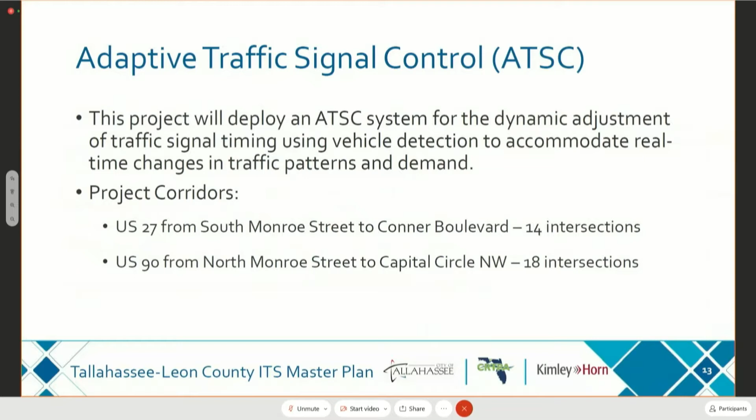Studies have shown this technology is better suited for corridors with dynamic traffic patterns. The two locations identified were Tennessee Street, right along the campus, and Apalachee Parkway, where we have a lot of the retail. That's where we experience a good bit of dynamic traffic patterns, really best suited for this type of technology.

It's the same idea, not quite the same level of priority, with transit — if we know where the bus is and that it might be behind schedule, we can turn the light, either extend the green a little longer or bring it up sooner, to get the bus through and keep it on time. The idea is to improve on-time bus performance and reduce bus travel times to make our system more reliable.

We upgraded our controllers, the brains of the traffic signal, back in 2016, which allows us to take advantage of this, and we also upgraded our preemption system, which is what the emergency vehicles use. So this transit signal priority piece is simply adding more devices to the buses themselves to take advantage of this technology.

The next project is the I-10 Trailblazer project. This has been talked about for probably the last 10 years or so — how do we handle major incidents, particularly an I-10 freeway closure? Right now, when an incident happens on I-10 and folks are detoured onto local roads, motorists are kind of left to their own devices once they get off the freeway.

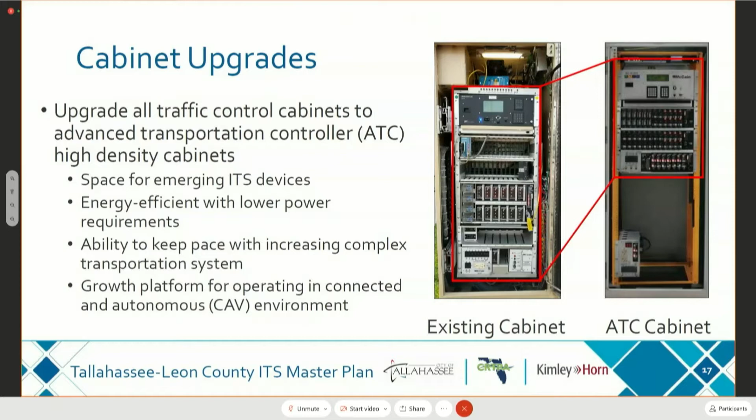When we talk about this, think about things like dynamic cruise control, or the fact that your vehicle can decelerate if you're approaching the car in front of you too quickly, or sensing the lane and if you're moving outside of that lane, it can give you a warning, or in some cases some of the newer vehicles are able to guide you in the right direction. So we're seeing this happening. The automotive industry is definitely moving forward in these directions.

And as this changes, it really does change the landscape of our transportation infrastructure. So we want to be thinking about that.

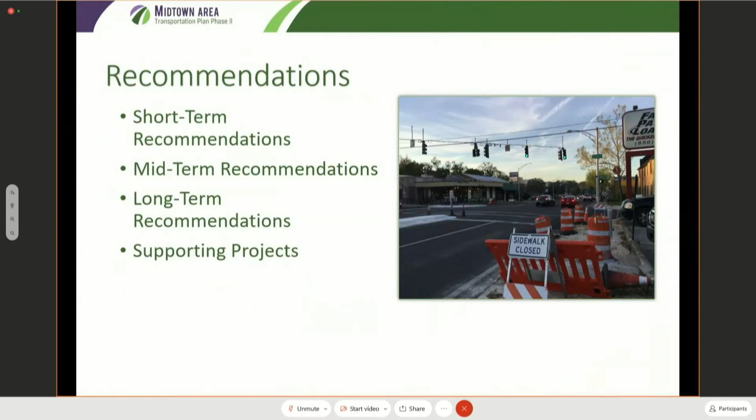The way we have these broken down are by short, mid, and long-term recommendations. Some are things that will be done by partnerships throughout the city and the county, as well as we're going to highlight some supporting projects, just to show that we know Midtown - there are a lot of things happening, it's exciting, and we're going to start to see some really great changes there when it comes to the transportation network.

So these are some of the recommendations that we'll walk through today. One of them is Meridian Road, which was really identified as a gap within the transportation network. So from 7th Avenue on Meridian Road, where Midtown Caboose is located, we're recommending that a sidewalk be placed on that corridor that connects where the sidewalk currently ends up to south of Tharp Street, right in front of the church there, where the sidewalk on the northern part of this area currently ends.

So we've recommended that a study be looked at to determine if this is feasible, just because there are some right-of-way constraints along this area, and we know that's going to make adding a sidewalk very difficult. But looking at a study to see if there are opportunities to put all the utilities on one side of the corridor to accommodate at least a 5-foot sidewalk on the other side would be really great and help with connectivity.

It also helps to get some movement going from those that live in Los Robles. We had a couple meetings with that neighborhood association, and several participants came to the public meeting, but they really felt isolated in terms of connectivity. They live right there in Midtown, but it's very difficult for them to get out of their neighborhood by foot or bike safely to access everything nearby. So another recommendation is an RRFB crosswalk at DeSoto Street, which connects Los Robles to Lake Ella, and if there was a sidewalk on Meridian, that would extend further south to everything else within the Midtown area.

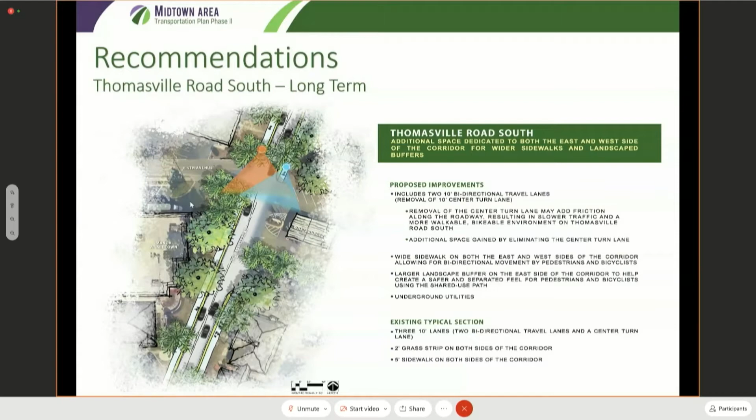So the next slide shows those renderings. The photos on the left show what's existing out there, and on the right shows what it could be.

As you can see, it's wider sidewalks, wider paths where people could move bidirectionally on bikes as well as on foot, with some nicer landscaping to add that buffer that we heard from a lot of the public they wanted to see—not just grass, but plants to make it feel a little safer for those using the facilities. Removing that center turn lane is also going to add friction onto the road, which will slow people down as well.

These are the cost estimates developed for the project. We looked at a low estimate as well as a high estimate—used some DOT data, talked with Blueprint about similar projects they had and got some numbers from them. We came up with about a $2 million low estimate to a high estimate of about $3.5 to $4 million.

That estimate includes undergrounding of utilities in this area. We looked at undergrounding because we really feel like this space from Monroe Street up to 7th is really the heart of Midtown. It's an opportunity to make it a place, make it feel like a destination, and undergrounding the utilities really allows for this recommendation to be implemented.

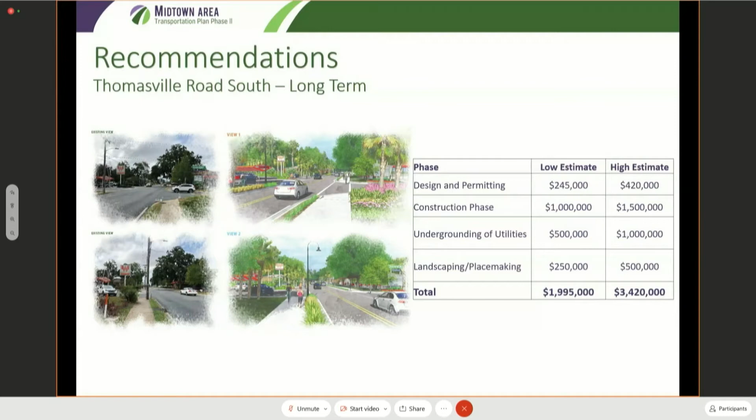For the north part of Thomasville Road, this really looks at Colonial Drive up to Betton and Bradford Road. Colonial Drive is where Thomasville Road starts to expand into a 6-lane corridor—essentially 3 travel lanes, and then you have some left turn lanes.

So the recommendation for this area is to reduce one travel lane in each direction, making it four travel lanes, while keeping the existing left turn lanes that allow access into the Whole Foods parking lot and the Five Guys parking lot on the other side of the road. That would also allow for shared use paths on both sides of the corridor.

Right now what's existing out there is a lot of inconsistency with the lane widths—the outside lanes are 14 feet, middle lanes are between 11 and 12 feet. With how Thomasville Road goes from 2 lanes to 6 lanes down to 4 lanes, there's some inconsistency. So bringing it down to just 4 travel lanes that are all consistent, probably 11 feet, allows for much wider shared use paths with buffers out there.

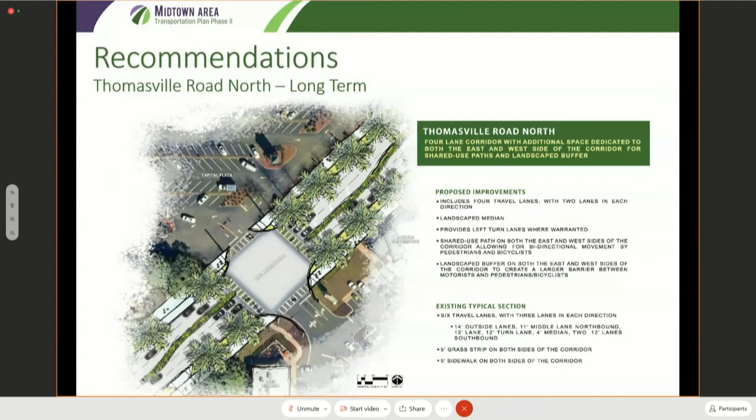On the next slide we'll show you what that looks like—what's existing versus what would be proposed with the removal of those 2 travel lanes in this area. For this one we also created cost estimates, a high and a low.

This project is going to take a lot more coordination, and the southern part is as well. These are both really long-term solutions involving partnerships and working with FDOT—we have met with FDOT and talked to them about these projects, and just understanding what we heard from the public moving forward.

So this project would be about $3.3 million to about $5 million, and that includes undergrounding in this area as well, just to be consistent within this whole project area. It would allow that shared use path, that more accommodating pedestrian and bicycle facility, to go all the way from Monroe Street up to Betton and Bradford Road. That's really a huge piece that connects a lot of different destinations people want to connect to.

As I mentioned earlier, we want Midtown to become a place where people can park once and be able to feel comfortable and safe walking to all the destinations along this area.

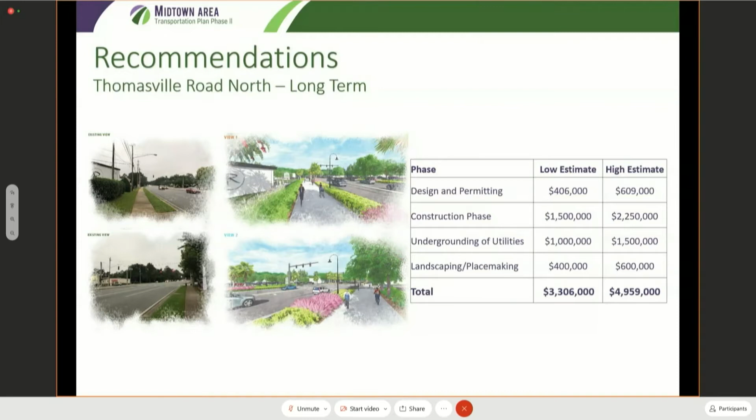So Monroe Street is a little bit more difficult because there's not really a lot of...

No room here, but with Monroe Street, there's not a chance to change the current configuration of the road like we did for Thomasville Road, where there was existing traffic out there to remove those extra lanes as well as the turn lanes. Monroe Street, we don't really have that opportunity, and there's really not right of way to be flexible with.

So some of the recommendations coming out of Monroe Street would be more looking to modify that center turn lane to accommodate some landscape medians for more of beautification out there, and really trying to figure out opportunities to maybe change the lighting that's out there. A lot of the possibilities for Monroe Street could come from redevelopment along this corridor that would accommodate things like larger sidewalks and better landscaping. But these are some of the recommendations we'd have moving forward, having that landscaped median to beautify it a little bit.

Now we'll go through some of the supporting projects quickly. There are short-term pedestrian improvements going on between summer of 2020 and summer of 2021, FDOT is going to add RRFB, rectangular rapid flashing beacons. It's similar to what's out there right now at 5th Avenue next to Whataburger to cross the road. They're going to put one south of Calhoun Street at William Street and then south of Beard Street, so there will now be several to allow people to safely cross within that heart of Midtown area. That's something we'll see installed out there by DOT hopefully within the next 9 months.

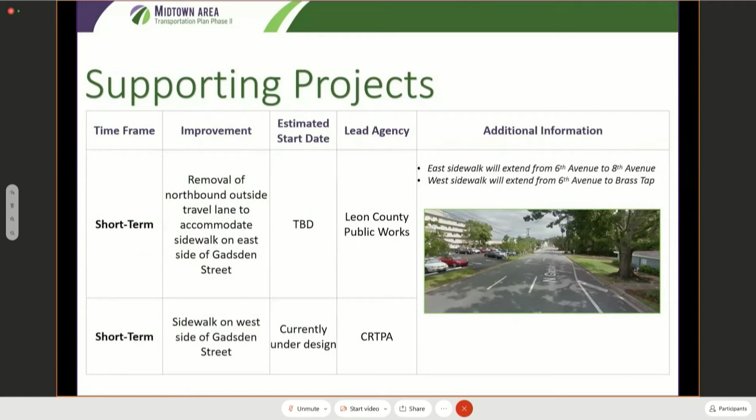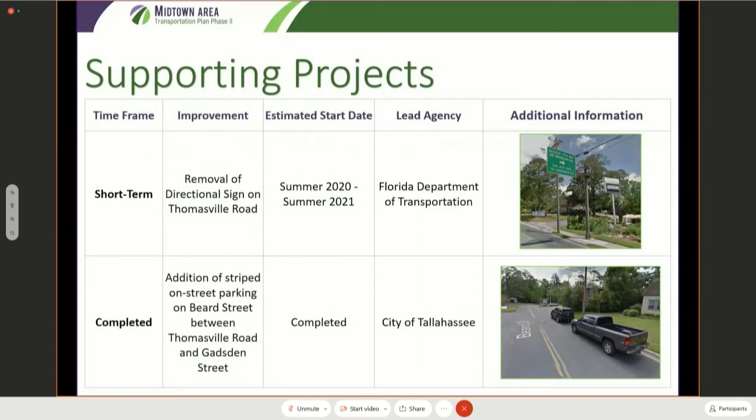Removal of the directional sign along Thomasville Road is also something DOT is going to come out and fix within the next couple months, getting rid of that large sign that's currently in the middle of the sidewalk and impedes movement along there. As well, the city has recently put some striped on-street parking along Beard Street between Thomasville and Gadsden Street, so if you've been out there recently, you could see some of that.

As well, the midterm recommendations include that Beard Street realignment and pedestrian crossing. That's something we'd like to see done within the next 5 years to really help with how people move at that intersection, as well as allow for better crossing so people who live within the Midtown Lafayette Park neighborhood can better access Midtown.

And then just some additional safety improvements along Thomasville Road. This study has been completed by FDOT, and it would look at that area from 8th Avenue all the way up to Betton Road, so that really needs to be coordinated with the recommendations we've made out of this plan.

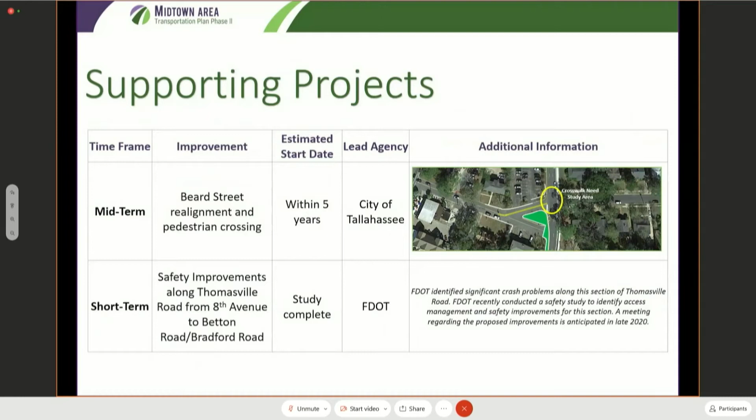So the next steps, as I mentioned, will be additional traffic analyses for those long-term recommendations along Thomasville Road, really understanding how it might affect the left turn movements as well as the intersections out there, and then ongoing coordination with DOT, City of Tallahassee, and Leon County to implement the other recommendations from this project.

But it was really incredible to see how many people wanted to come and participate within this project and gave us a lot of feedback. That's the reason why the one-way idea went out the door very quickly, we heard right away from businesses and residents it wasn't something they wanted to see. So that's where we had to start to be innovative and think what else we could do within the existing right-of-way to accommodate what we were hearing from the public in terms of having better connectivity, safety, and more of a place. With that, I am more than happy to answer any questions that y'all may have on this and talk through anything in more detail.

Mr. Chairman? Yes, sir, go ahead. Thank you very much, Caitlin, great presentation.

Thank you very much, and this is really exciting work. I think many of us went to some of those public meetings on the Midtown Plan and spoke to a lot of the folks that were there, and it looks like you incorporated a lot of their feedback, which is great. Just one question on the traffic studies for the long-term recommendations for Thomasville: when do you think, what's your best guess on when some of that analysis might come back to us?

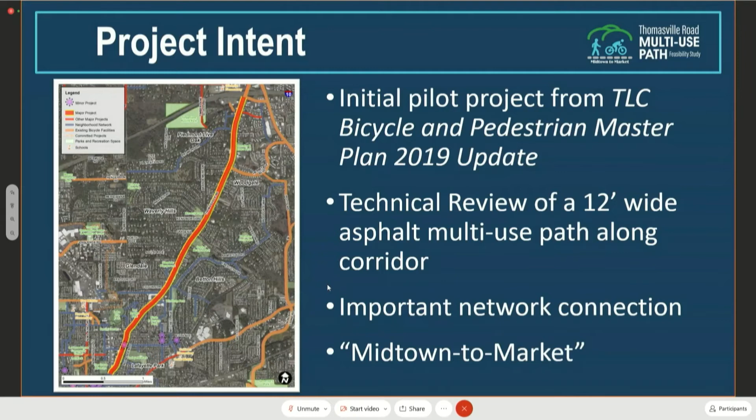So we looked at Thomasville Road and said to ourselves, there are partial facilities out there, and there sure are a lot of people who live along this corridor. As you can see on this aerial, just thousands of people are directly connected to Thomasville Road. So this project was identified as a major project as part of this early initiative coming out of the master plan, to analyze whether it's actually feasible to build this.

So with that in mind, we have several project goals. Obviously, we want to maintain safety. We want to provide accessibility to all of those residences and businesses along the corridor. We want to make sure we're providing the best network connectivity in the study area. We also want to design a facility that's going to be used and enjoyed by people. It is a very noisy corridor, so that's something we'll have to keep in mind. We want to be equitable and make sure we're serving aging populations and low-income areas as applicable. And we want to make sure we're being multimodal and providing health and recreation benefits.

Our project approach, we broke this down into two parts. The first part is looking at connecting it from Betton Road up to Metropolitan, and then from Metropolitan into the market area. I'm going to take these one at a time to better understand the areas, since there are different needs in the corridors, so we're going to step through these one at a time.

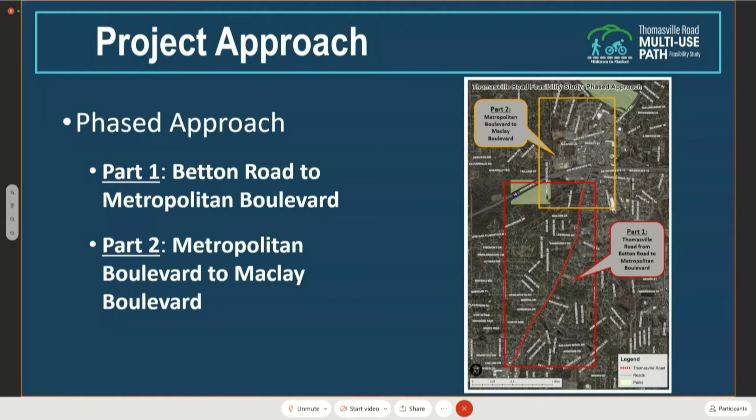But first, I'd like to talk a little bit about some of the activities. I said this is a technical analysis and not necessarily with full public involvement as yet. We've done a lot of site reconnaissance - both planners and engineers have been out there to look at the corridor. We assessed right-of-way, sidewalk locations and condition. We looked at the existing bicycle and pedestrian facilities. We looked at all the intersections from the standpoint of whether they're residential access points, public streets, or business locations. We even have a firehouse out there, so we had to look at all those different aspects of those crossing facilities.

We wanted to also look at this from a parks and recreation perspective. One of the things this corridor would do is actually connect as many as 6 to 8 existing parks, which is not currently the condition out there. We also looked at schools, and we performed a preliminary tree assessment, since I'm sure a lot of you know there are a lot of mature oaks out there, and folks generally pay attention to that and appreciate it.

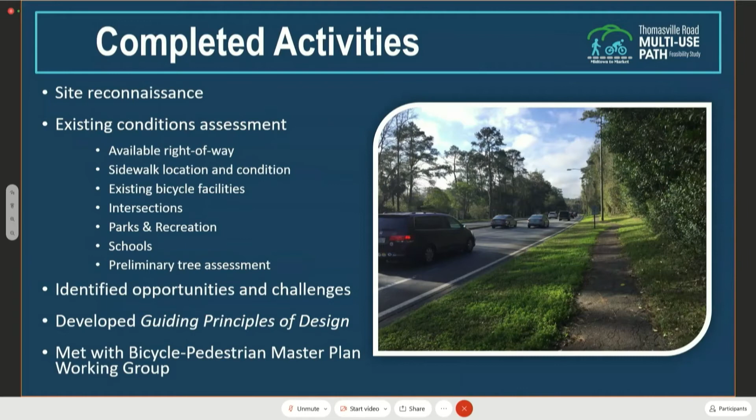So we've done all of that. We've identified the opportunities and challenges for this corridor, and developed a set of guiding principles for design—things like understanding there's topography out there, so we'll have to design these intersections with that in mind. We also met with the implementation arm of the master plan, our bicycle pedestrian working group, to get input along the way.

So this part one section from Betton up to Metropolitan is a 4-lane road. We've got landscaped medians out there and turn lanes. There are 4 major intersections that would have to be dealt with, and there's a 45-mile-an-hour speed limit out there.

On the east side of the road, there's an ADA compliant sidewalk that a lot of people use on a daily basis. We've seen everything out there from kids on bikes to joggers, and we've seen folks doing all of those things at one time. It gets a lot of use.

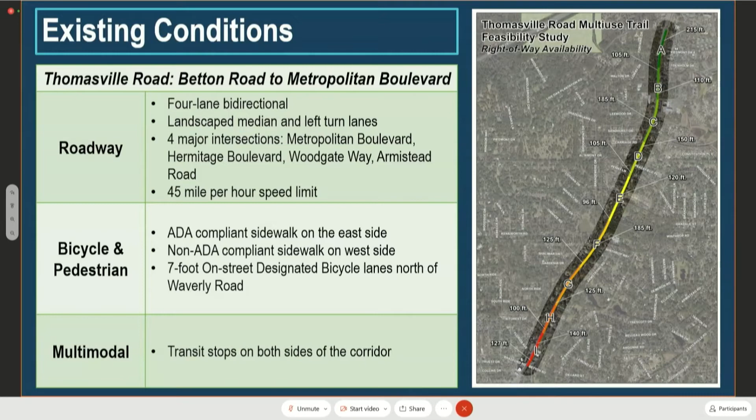On the west side of the corridor, there is a non-ADA compliant sidewalk—I think that's what it was intended to be, but it's basically asphalt that does not meet any current standard. There's also intermittent 7-foot on-street designated bike lanes north of Waverly Road. This is discontinuous throughout the corridor, installed a few years back just because the outer lanes were wide enough to do so. There's also transit stops along the corridor as well.

So I mentioned the parks. This is the list of parks directly connected to this segment: Dorothy Oven Park, McCord, Waverly, and the Goose Pond Trail that connects over to Hermitage Boulevard.

We're looking at things like the positive user experience. For those who have used the coastal trail down on 98 in Wakulla County, you know there's a pretty significant effort put in toward keeping the trail off of 98 as much as possible. That would be the goal here as well—we'd like to keep this landscaped and buffered from the road as much as possible. There are also some complementary projects that I'll talk about later that merge in with this project.

We also have these other existing facility connections. We want to connect to Hermitage and the designated bike lanes there, Metropolitan and the bike lanes there, and then the Goose Pond Trail—we have a great connection to that as part of this preliminary plan.

We'll also look at safety improvements along the corridor in several different locations, and we'll look at signalized intersections where a crossing could occur where we need it to. There are some right-of-way constraints in the corridor, but nothing we can't deal with in terms of this being feasible.

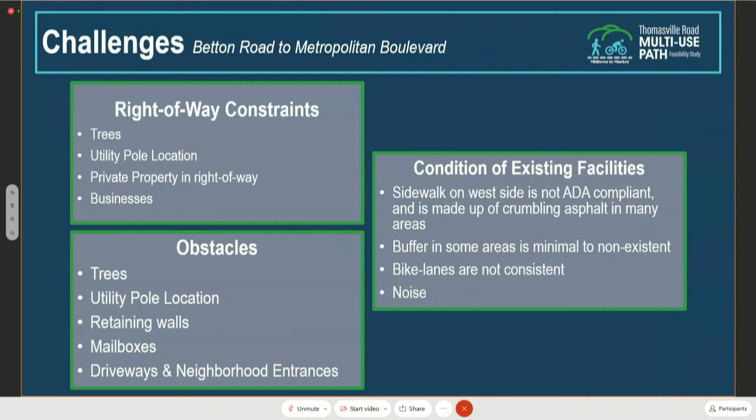So I'd like to talk a little bit about these complementary projects. One of them is the McCord Pond Drainage Ditch Improvements. This area is actually just north of Betton Road. There's a drainage corridor that goes through there, and this is actually being used by people today—you'd never know it, but this is directly adjacent to Thomasville Road.

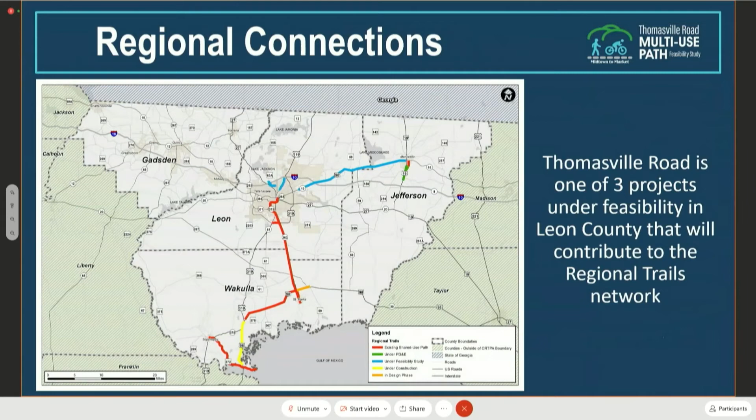This slide basically shows how Thomasville Road fits into this larger regional connection. It's one of 3 projects currently underway for feasibility, including the US 90 corridor and the Lake Jackson corridor. This slide shows the very important connectivity of Thomasville Road throughout the network. All of these dashed lines are other routes identified in the bicycle and pedestrian master plan, and you can see that Thomasville Road is a vital connection through this area. As I mentioned earlier, it connects from the Market District down to Midtown into other areas in the network.

So just some of the next steps. I talked about this public engagement outreach that will begin soon this fall. We'll be holding additional stakeholder meetings and coordinate with local neighborhood associations to get input, opinions, and buy-in. We will organize engagement opportunities virtually, in person, or however we can conduct that, and ask for their feedback so we can make sure the feasible alternatives are based not only on technical analysis, but on input from the public here in Tallahassee.

So with that, I'd be glad to take any questions that you have at this time.

Curtis, are you there? I made it back. I don't know what happened. Okay, what was your question, Curtis? Oh, I couldn't hear. For some reason I lost the last part of the presentation. I had to get off and come back.

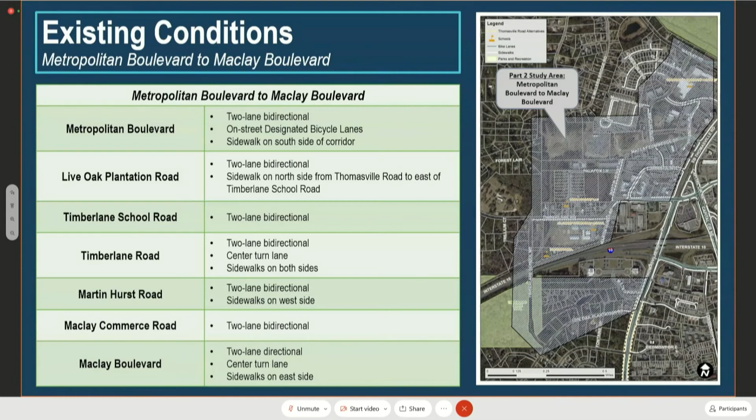And you mentioned those schools, I'm glad you did. On that path that I showed you earlier, there actually are gates and fences along this corridor right here that back up to all those schools. So it was kind of interesting. You can literally look over the back fence of those schools from this corridor right here. Yeah, I've walked that goat trail quite a bit myself. It's not the most appealing, as you stated, but with the improvements you're talking about, I think people are going to be very, very receptive to it. So thank you very much.

Thank you, Mr. Chair. Yes, sir. I can't see raised hands, but Kristen, I'm sure yours is raised. So go ahead.

Thank you, Mr. Chair. I actually don't have a question. John, I think this is a great presentation. And since the chair gave me the opportunity, I'll just say to Greg Burke, Greg Slay, and Jack, I suppose, I think this is another example of a project that could really use that kind of flow chart to map out who's doing what aspect. I know we're at an earlier stage than we are with Midtown, what we just talked about, but I also have walked that goat trail a good bit, although I've never seen Commissioner Minor out there at McCord Park. But I think a lot of people actually discovered it in the last 6-7 months as they were staying home, and my sense is it's gotten a lot more traction - no pun intended - but a lot more use. So I do think the improvements are going to be welcome, but if there's a way to map out the blueprint piece of this, the city, county, CRTPA piece of this going forward, that will help us with future decisions. So thank you very much.

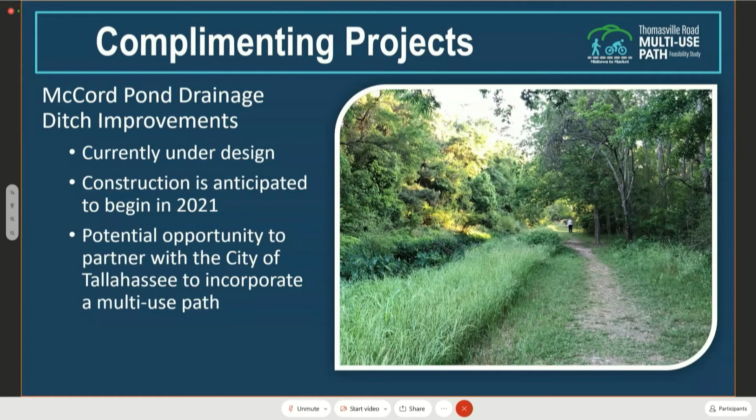I'm excited about this. Are there any other questions or comments? Mr. Chairman? Yes, sir. Just very quickly, the city is looking at a bicycle park in the Market Square district. Will this connect to that bicycle park? So this slide right here, this is the park where I believe that bicycle park is proposed, Commissioner?

Yes. And yes, so basically our project would connect in this southern leg right here on Martin Hurst Road. And then we would cross probably right about here - I don't know if you can see my cursor. It will connect here and then connect to this trail, and then their trail is actually going to connect up to this point on Maclay Boulevard. And then we have a trail that actually goes along the west side of Maclay and connects all the way up to Maclay Road, where there are existing facilities today, and there's also a planned sidewalk on Maclay Road as well. So there's a lot going on in this area, and it's all been well coordinated, we believe, to provide really good network connectivity through this area.

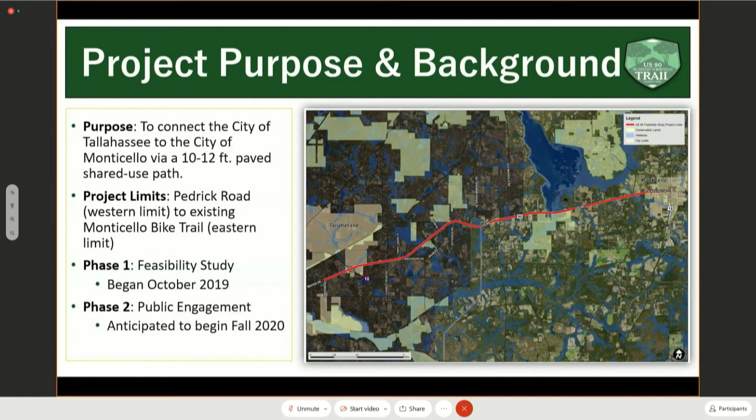So what we've been doing has actually been similar to Midtown as well as Thomasville that John just talked about, is looking at what is feasible out there. Is this project actually feasible in getting constructed? Is it safe? What's the right of way out there? What are some challenges? What are the opportunities? That's what we've been working on this past year, gathering all of that information, with a phase 2 that we're kicking off this fall, to bring it out to the public. So similar to what Greg Slade just commented on, probably for the rest of 2020 what engagement might occur would be things like meeting with additional stakeholders, with any public meetings coming in 2021.

So with that, the project goal is really to provide this safe, continuous facility between Tallahassee and Monticello. This project is identified on SunTrail, which is shared use, non-motorized trails. It's a project between FDOT as well as FDEP for building this regional trail network. So this is one of those projects that's identified as part of that network and connects Tallahassee, our capital, to downtown, beautiful, historic Monticello. We want to allow for new alternative transportation opportunities for the residents that live on both sides of this project, as well as the businesses and visitors within this area, to really attract people to this project, and that's going to help spur economic development and activity. So the longer the trails that are constructed, that attracts people not just locally, not just from the state, but nationally, right?

So this project connecting into Tallahassee, you have the existing trail in Monticello that's being extended under PD&E right now. There's just a lot of opportunity for growth. This project coming into Tallahassee, you have everything that's occurring from Cascades Park to FAMU Way to the St. Mark's Trail down to the Coastal Trail. So you really do have this regional network that we're now expanding into 3 counties. So that is a lot of opportunity to bring a lot of people to our area for this type of recreational activity.

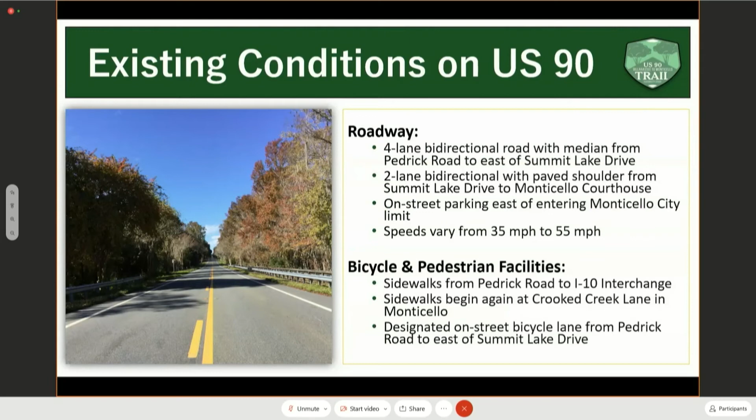But as you can see on the photo on the screen, there is a paved shoulder, and every time we've been out there for a site visit, sure enough, we always see somebody riding along that paved shoulder, so we know it's pretty heavily used right now.

So that brings us to the opportunities for this project. It really is a beautiful corridor that's out there. There's a lot of shade. Where there is available right-of-way, that right-of-way is absolutely beautiful. It can be well separated from the corridor. You go behind some great mature trees along that area, and that's ideal, especially for cyclists traveling long distances.

Aesthetically, it's really unique for North Florida. The topography out there is just really different, making it a really big attractor for people wanting to come and use this facility. It is also an existing bicycle route—a lot of long distance riders currently use it, and we see a lot of people every time we've been out there using the paved shoulders. I think if you talk to a lot of cycling groups, they're using this on their weekend rides all the time to connect down to Monticello.

So some of the challenges out there—and I'll just note that these challenges aren't things that are going to stop this project or make it infeasible. These are just things we know we need to address, have conversations about, and make sure we're incorporating into this project as it moves forward.

Some of those things are: there are some areas where right-of-way is constrained, and those are the conversations we're having with some of the businesses, as well as opportunities to maybe keep the path on both sides of the road. So would we have to switch over in order to avoid some right-of-way constraints?

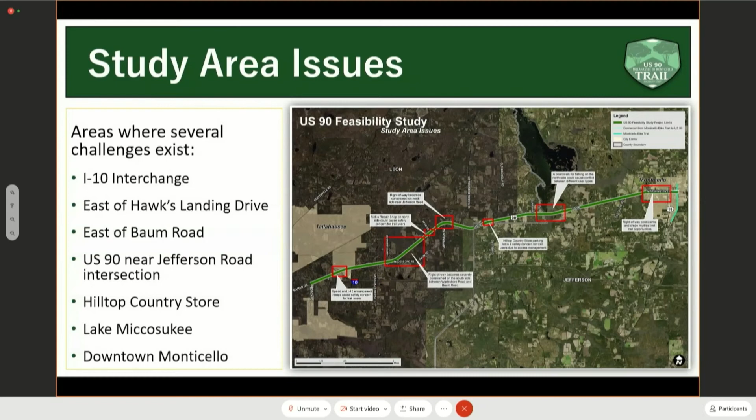Moving into downtown Monticello, there's very limited right-of-way. You have the Crepe Myrtles, you have a lot of historic homes, but fortunately there are existing sidewalks and paved shoulders out there, so there are definitely solutions to safely get people into Monticello - because that's ultimately the goal, to get people into Monticello and over to Tallahassee to bridge that regional connectivity with this project.

So what I'm going to go through now are some opportunities that we've identified during this feasibility study. These are not the final opportunities by any means. These are things we're going to bring forth during the public engagement process to hear back from the public and really understand what they would like to see. Are there things we didn't know about out there? These will probably be refined as we go into public engagement. So we're calling these opportunities, and there are 3 of them.

Some of the study area issues include things like the I-10 interchange, which would be on the south side of the road east of Hawk's Landing Drive, as well as the Hilltop Country Store and Lake Miccosukee. Those aren't challenges exactly, but we have to address those areas in terms of wetlands and working with the businesses out there. On this slide you can see a summary of those things we're seeing as challenges, but they don't stop the project by any means, as well as opportunities.

Having 2 crossings along over 20 miles of trail is a pretty limited number, and there probably wouldn't have to be any right-of-way acquired, because we would stay in areas where there is ample right-of-way to construct a 10 to 12-foot multi-use path. In some areas that are more constrained, we would go down to 8 feet.

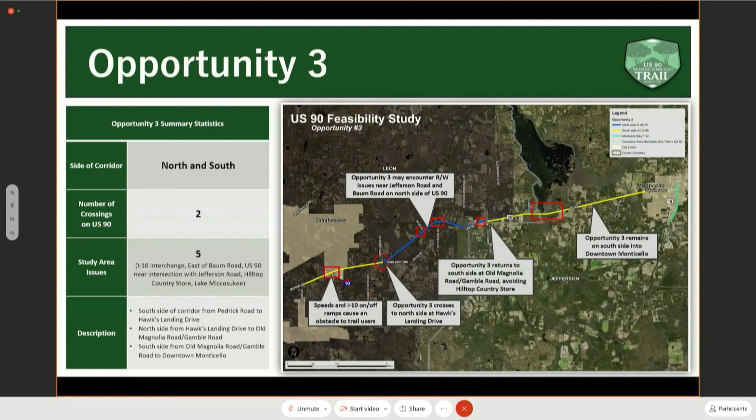So what's next with this is really finalizing a feasibility report with alternatives. We're not going to do that until after the public outreach, because these opportunities we looked at were just things that helped us identify, as we were going through the feasibility phase, what could be done along this corridor. So when we reach out to the public, they're going to be able to provide us with more insight, let us know what they would or would not like to see along the corridor.

So those opportunities will be evaluated, and then from that we're hoping to have a preferred alternative by the public that would move forward. And then there's possibilities to apply for things like SunTrail funding, because this is a priority project on the SunTrail network for next phases, such as PD&E and design and construction. So those are really some of the next phases after we finalize this feasibility and move into the public engagement.

And with that, as I mentioned earlier, it's going to be a lot of stakeholder engagement, with property owners and businesses, as well as the public meetings that will be out there. We'll coordinate with different neighborhood associations just to make sure we're really getting the word out and having as many people participate. But with the meeting with the Board of County Commissioners, as well as discussions with City of Monticello, they're really encouraging with helping to get the word out and hopefully having a lot of people participate during this process when we kick it off early in the new year.